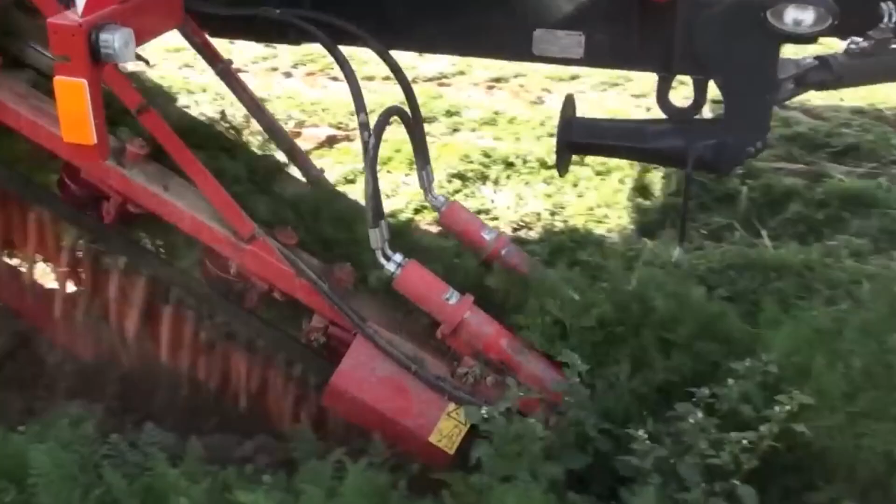Modern agriculture machines that are at another level. In this era of advanced machinery, the agricultural sector is witnessing a transformative revolution characterized by machines that transcend the conventional, reaching a level that can only be described as extraordinary.

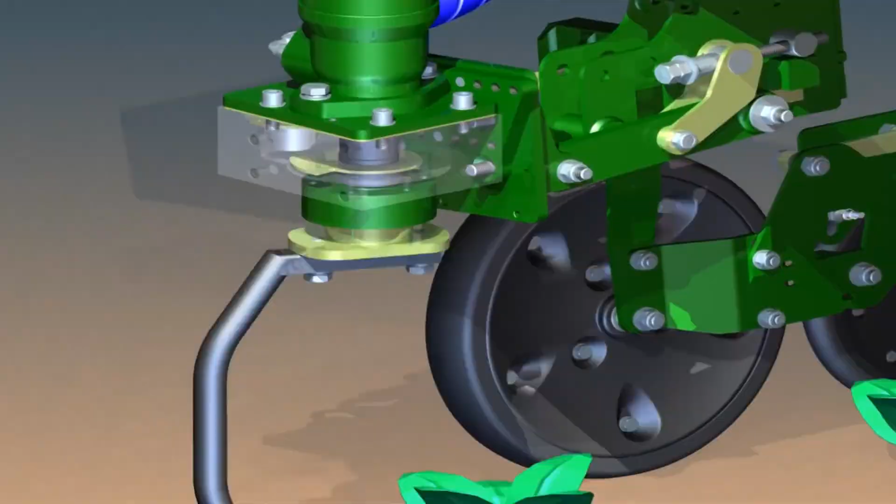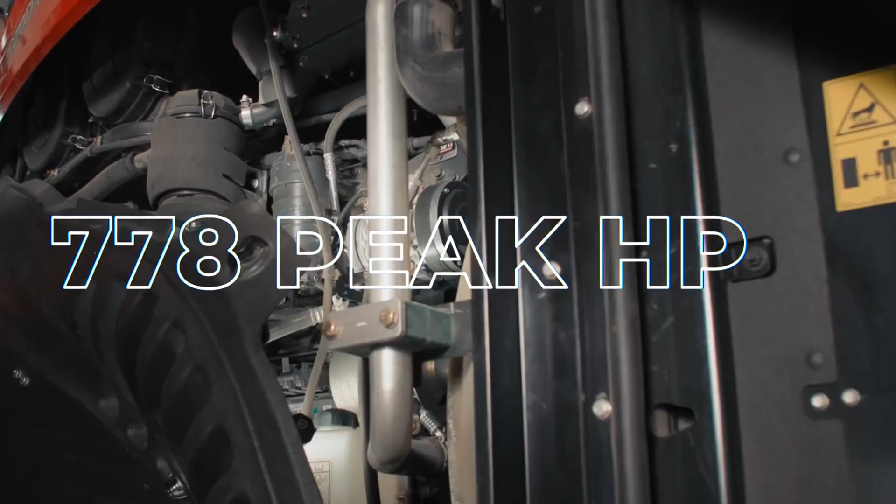These modern agricultural machines are not merely tools. They represent a synergy of cutting-edge engineering and a profound understanding of the challenges faced by contemporary farmers. From precision planting to autonomous harvesting, these machines embody a paradigm shift in agricultural practices, promising increased efficiency, optimal resource utilization, and sustainable farming solutions.

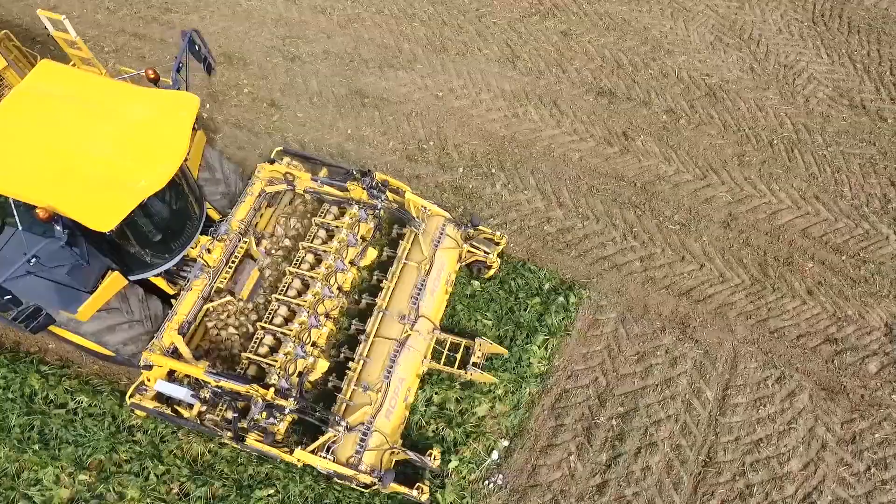The amalgamation of robotics, artificial intelligence, and data analytics has given rise to a new era in agriculture, where machines operate at a level that not only streamlines processes but elevates the entire farming experience.

DeWolf GBC1. The DeWolf GBC1 emerges as a pioneering force in the realm of grain bagging, transcending conventional storage methods to offer farmers a cutting-edge solution that redefines efficiency.

At the heart of this innovation lies a sophisticated bagging mechanism that streamlines the storage process. Unlike traditional silos, the GBC1 allows for the direct storage of harvested grain in bags, mitigating the risk of spoilage and preserving the quality of the crop.

A technological marvel, the GBC1 incorporates intelligent features that contribute to its ease of use and reliability. Its user-friendly interface empowers farmers to navigate through the bagging process seamlessly, ensuring a hassle-free experience during the critical harvest period.

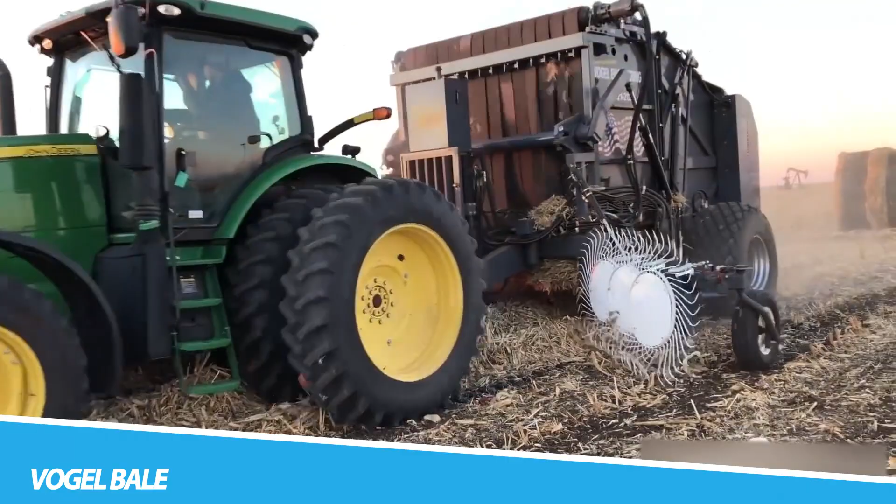Tailored to handle a diverse range of crops, from the lush greenery of hay to the golden strands of straw, this baler stands as a testament to agricultural innovation.

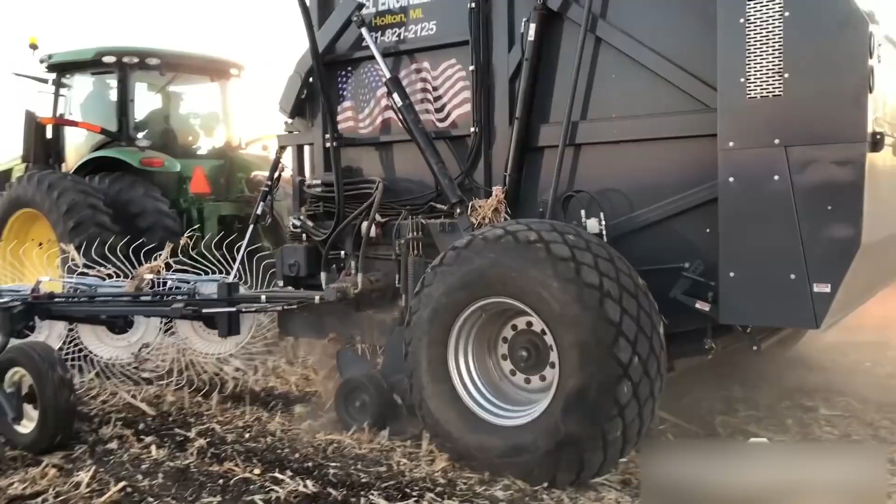Central to the Vogel Bale's prowess is its advanced knotting system, a symphony of mechanical precision that ensures the formation of uniform, tightly secured bales. This not only streamlines the harvesting process, but also guarantees the integrity of the crop during storage and transportation.

The machine's adaptability shines through, accommodating the nuances of various crops with a level of finesse that distinguishes it from traditional balers. Stick rakes. Stick rakes, though seemingly simple in design, represent a critical component in the arsenal of modern agricultural machinery.

These implements, attached to tractors or specialized equipment, play a pivotal role in land preparation and maintenance, particularly in areas with dense vegetation or after crop harvesting.

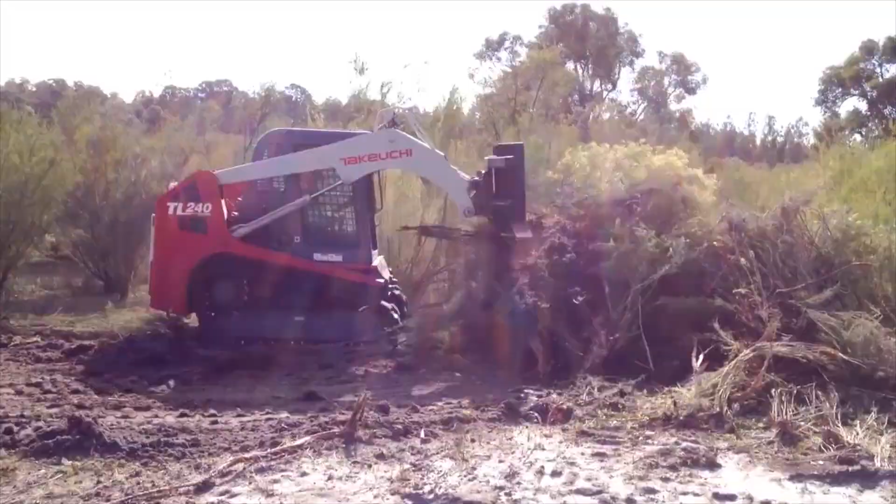The design of stick rakes is a balance between durability and efficiency. Typically equipped with sturdy tines or prongs, these rakes excel in clearing debris, plant residues, and unwanted vegetation from the field. The adjustable nature of the rake allows farmers to customize its height and angle, catering to the specific needs of different terrains and crops.

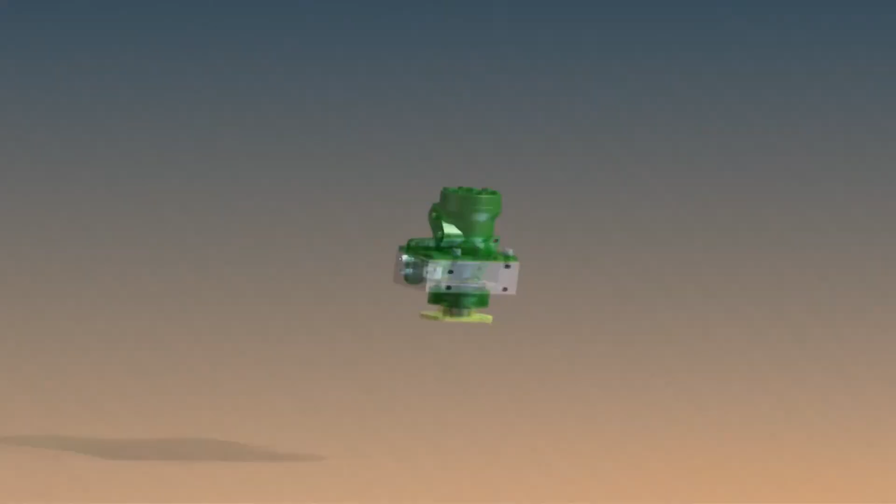In-row weeder. The in-row weeder emerges as a beacon of innovation in the realm of precision agriculture, transforming the approach to weed management with a level of accuracy and efficiency previously unparalleled.

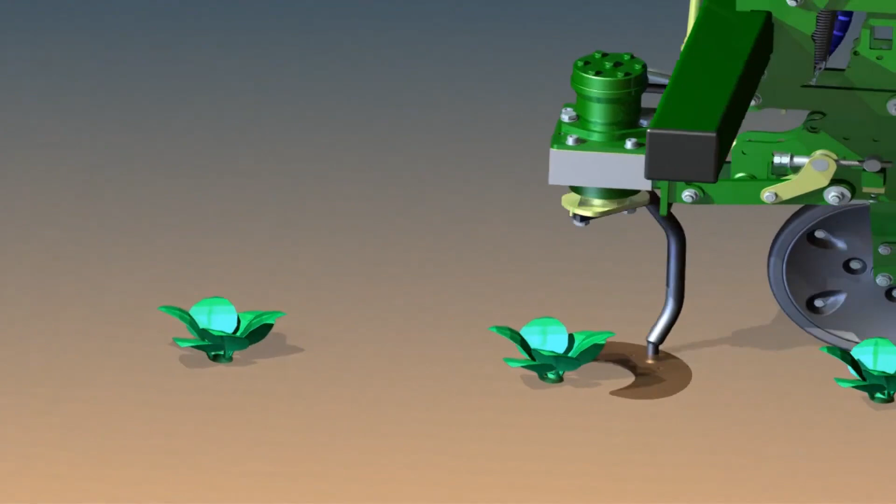This implement, often mounted on tractors or specialized equipment, revolutionizes weed control by targeting unwanted vegetation within crop rows with surgical precision. At the core of the in-row weeder's effectiveness is its ability to discern between crops and weeds.

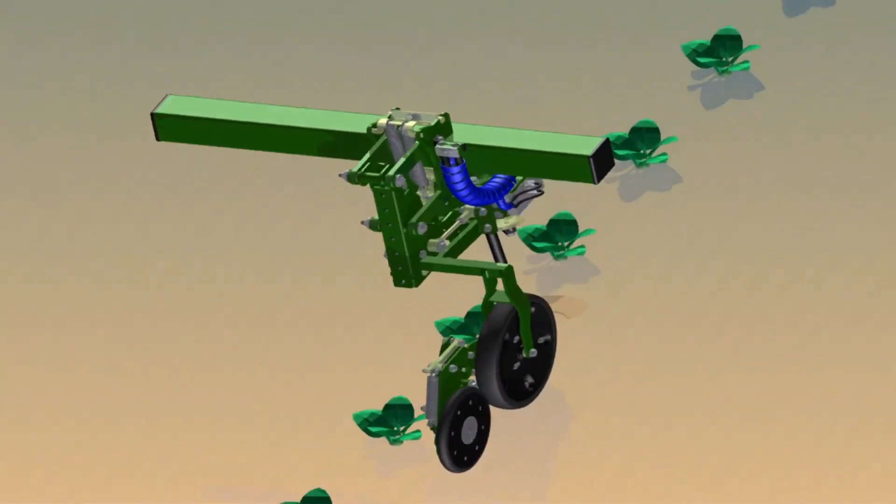Utilizing advanced sensor technologies, often incorporating machine vision and artificial intelligence, the weeder can identify and selectively eliminate weeds while sparing the cultivated plants. Claas Cougar.

The Claas Cougar, a formidable presence in the world of agricultural machinery, epitomizes the fusion of power, versatility, and technological sophistication. Often recognized as a self-propelled forage harvester, the Cougar is engineered to conquer the challenges of harvesting various crops with unparalleled efficiency.

One of the standout features of the Claas Cougar is its cutting-edge harvesting head. Equipped with an array of rotating blades or discs, this component excels in swiftly and precisely cutting through crops, such as maize, grass, or other forage crops.

The adjustable nature of the harvesting head allows farmers to customize the cutting height and gather the optimal amount of crop material. Beyond its harvesting prowess, the Cougar incorporates advanced technology for crop processing.

Case IH Steiger: The Case IH Steiger emerges as a titan in the realm of modern agricultural machinery, embodying the marriage of power and precision in the world of tractors. As a series of high-horsepower tractors, the Steiger is designed to tackle the most demanding tasks on the farm, from heavy tillage to large-scale planting and harvesting operations.

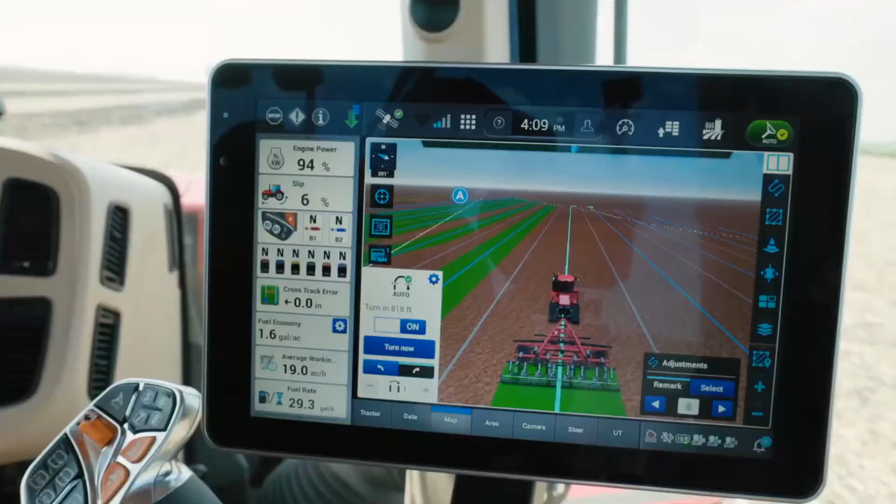At the heart of the Steiger's prowess lies its robust engine and powertrain. These tractors are often equipped with powerful, fuel-efficient engines that generate substantial horsepower, enabling them to pull large implements and cover vast expanses of land in a single pass. The advanced transmission systems contribute to fuel efficiency and optimal power distribution, ensuring seamless operation across diverse field conditions. The adaptability of the Case IH Steiger extends to its implement compatibility.

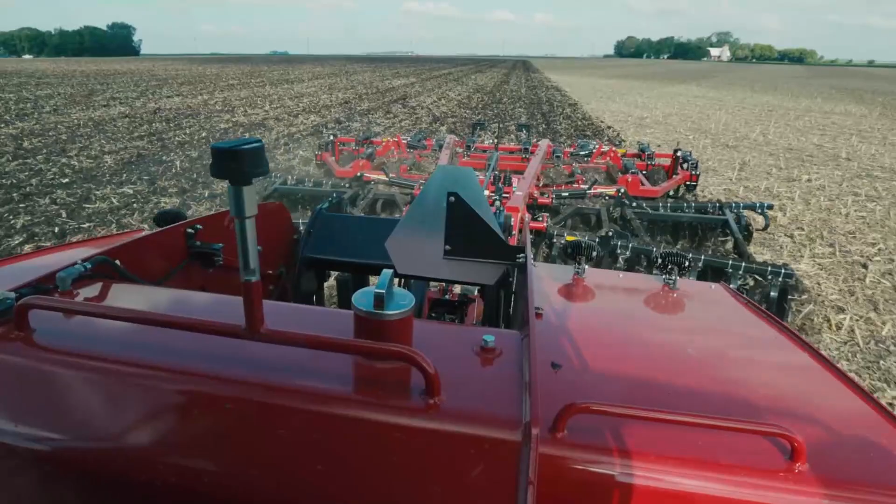Ropa Tiger 6: The Ropa Tiger 6 stands as a symbol of innovation and efficiency in the realm of sugar beet harvesting, redefining the landscape of agricultural machinery with its specialized design and advanced features. As a self-propelled sugar beet harvester, the Tiger 6 embodies a level of sophistication that addresses the unique challenges associated with this crop.

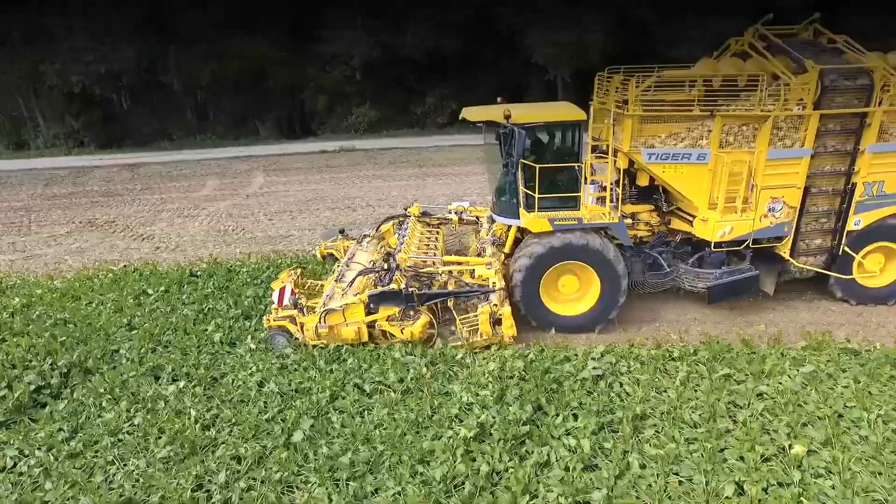At the forefront of the Tiger 6's capabilities is its harvesting head, a marvel of engineering designed specifically for sugar beet crops. Equipped with a series of lifting shares, cleaning units, and conveyors, this component excels in lifting, separating, and transporting sugar beets from the soil with minimal damage. The adjustable settings of the harvesting head allow for customization based on field conditions and crop variations.

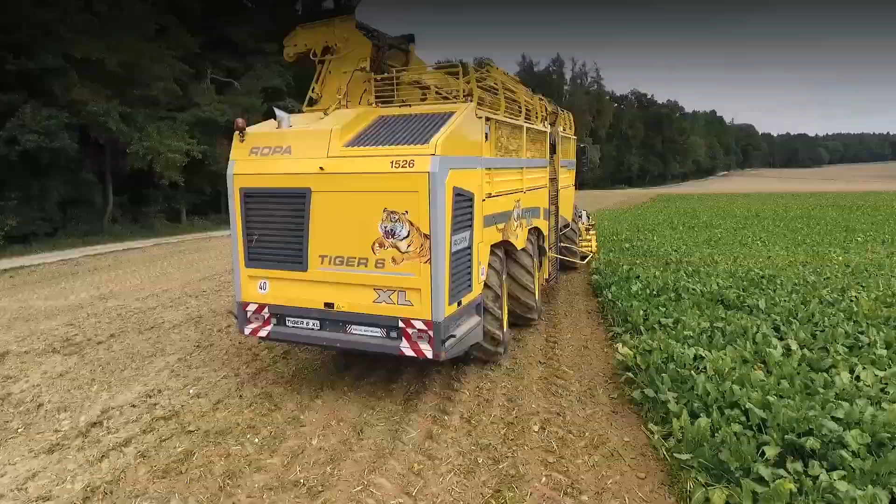One of the standout features of the Tiger 6 is its cleaning system. Incorporating advanced cleaning mechanisms, such as rotating rollers and sieves, this harvester ensures that harvested sugar beets undergo thorough cleaning before storage or transportation.

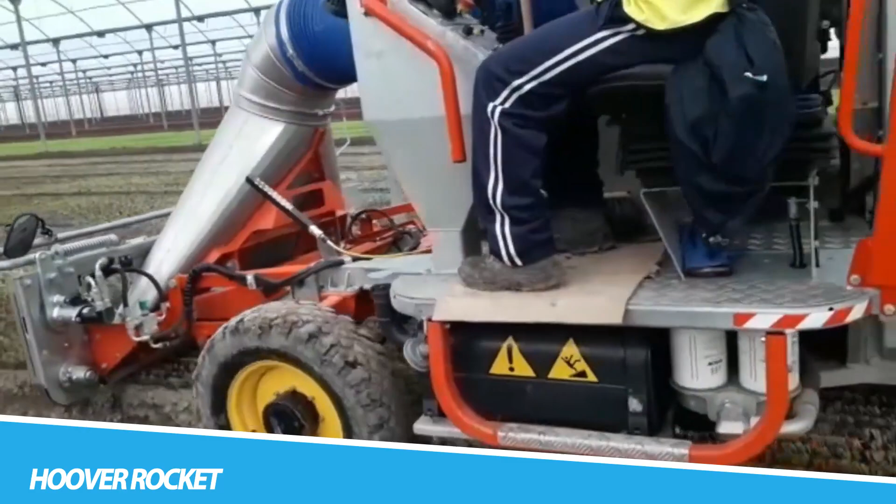Hoover Rocket: The Hoover Rocket, in the context of agriculture, is a versatile and powerful tool in the domain of crop spraying and pest management. As a self-propelled sprayer, the Hoover Rocket embodies efficiency and precision in the application of agrochemicals, contributing to the health and productivity of crops.

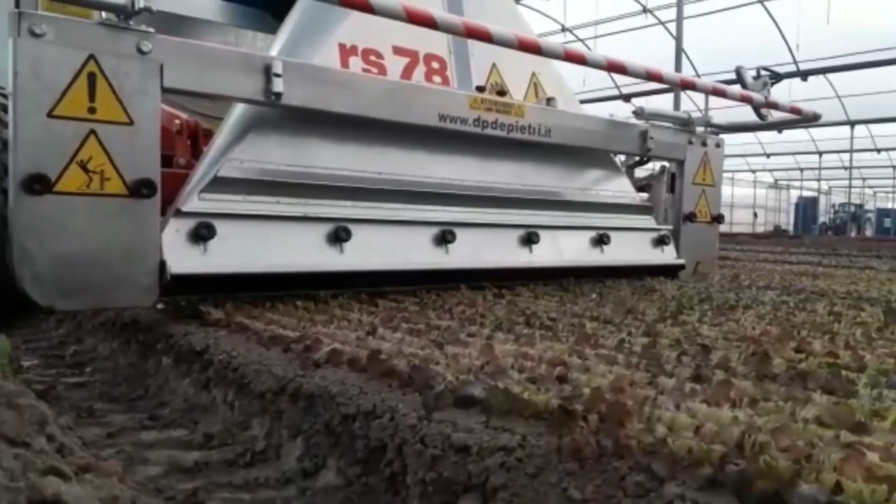At the core of the Hoover Rocket's capabilities is its spray boom system. This apparatus, often equipped with an array of nozzles, allows for the even distribution of pesticides, herbicides, or fertilizers over the cultivated fields. The adjustable nature of the boom, both in terms of height and width, ensures that the spray coverage is tailored to the specific crop and field conditions.

Precision in application is a defining feature of the Hoover Rocket. Equipped with advanced GPS and auto-steer technologies, this sprayer can navigate through fields with remarkable accuracy.

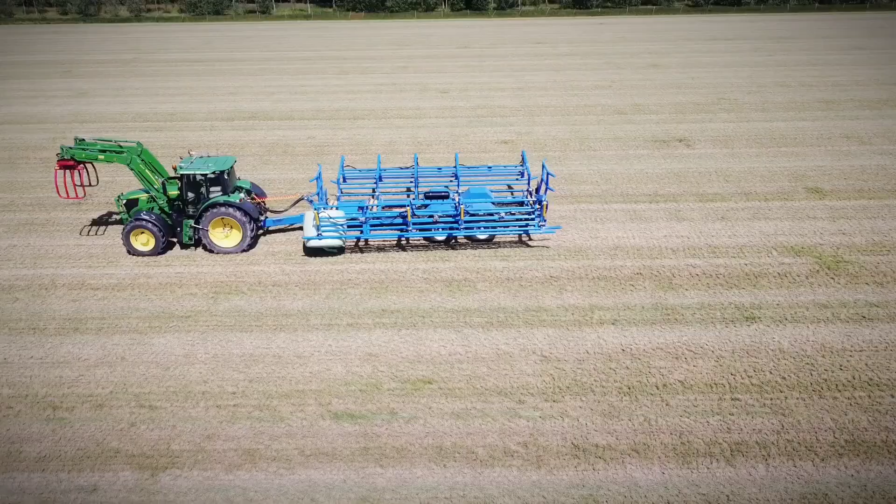Wilson's Supermove: The Wilson Supermove, a heavyweight in the realm of modern agricultural machinery, symbolizes the pinnacle of efficiency and innovation in the domain of grain handling and transportation. As a grain conveyor system, the Supermove streamlines the process of loading and unloading grains, redefining the logistics of grain management on the farm.

Central to the Supermove's capabilities is its conveyor belt system. This robust and adaptable component serves as a conduit for the seamless movement of grains, efficiently transferring them from storage bins to trucks for transportation or vice versa. The adjustable speed and direction of the conveyor belt allow for precise control over the grain handling process, ensuring optimal efficiency during loading or unloading operations.

The Supermove's adaptability is evident in its modular design. Often featuring telescopic conveyors, it can be extended or retracted to reach different heights and distances.